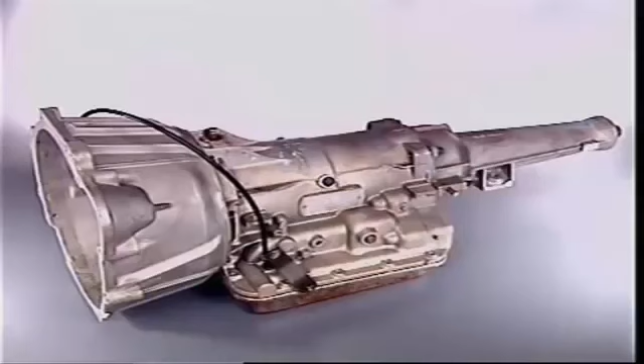A Borg-Warner 35 transmission has 3 forward gear ratios and reverse. The selector lever works in a quadrant with 6 stations: park, reverse, neutral, drive, second, first.

With D selected, the vehicle will move off in first gear, will change to second and then to third, in accordance with road speed and engine load.

Downshifts from third to second or second to first are also fully automatic, unless the driver resorts to kickdown. Kickdown changes are useful when short bursts of acceleration are required and occur at higher speeds than automatic changes. Automatic upshifts occur immediately accelerator pressure eases, following a kickdown.

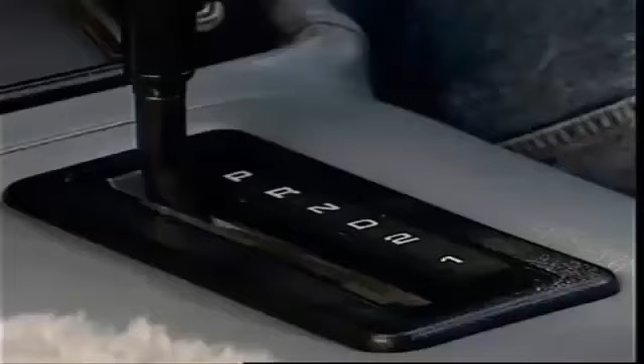Automatic gear changes may be overridden by use of the 2 and 1 selector positions. If 1 is selected from rest, first gear will be held until the selector is moved to 2, when second gear will engage.

Moving to D will then give third gear, provided that road speed and throttle opening are suitable. Selector position 2 also permits automatic changes, but from first to second and from second to first only, depending on road speed and throttle opening. Third gear will not engage in this position.

With the vehicle cruising in third, selecting 2 will cause an immediate downshift to second. Selecting 1 in similar conditions causes an immediate downshift to second, and then, when road speed drops sufficiently, to first. Full engine braking is available in both second and first gears. This also applies when the vehicle is in reverse.

The planetary gear set is a Ravigneaux type with primary and secondary sun gears, primary and secondary planet pinions, and 1 ring gear.

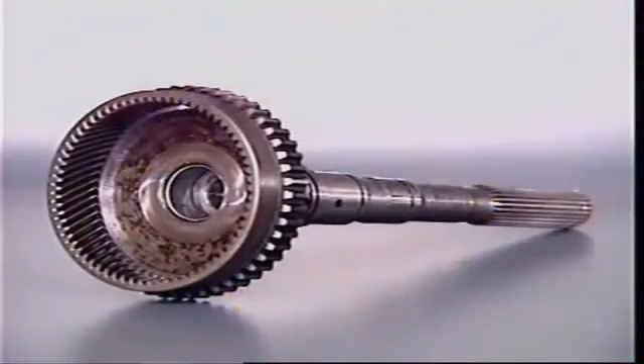The ring gear is attached to the output shaft. The planet carrier is mounted in the transmission case on a 1-way clutch.

Both sets of pinions are in the planet carrier. They mesh in pairs. The longer outer secondary pinions mesh with the ring gear at their outer edge. At their inner edge, they mesh with the secondary sun gear.

The smaller primary pinions mesh with the smaller primary sun gear. The planet pinions transmit the drive from the sun gears to the ring gear.

In all forward ratios, drive is transmitted through the primary sun gear. In reverse, it is transmitted through the secondary sun gear.

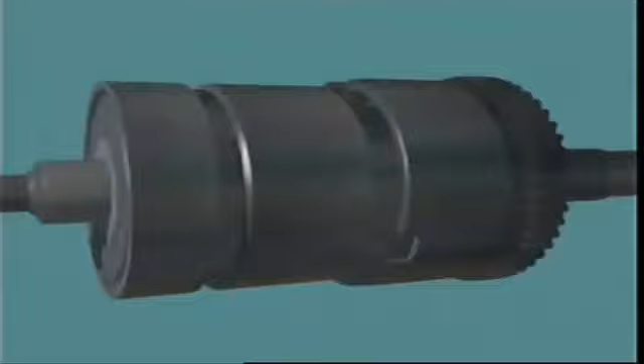Control of the planetary gear set comes from the operation of 2 multi-plate clutches, the 1-way clutch and 2 brake bands. The outer plates of the front clutch are splined to the input shaft from the converter turbine.

The inner plates are splined to the primary sun gear shaft. The inner plates of the rear clutch are splined to the front clutch drum. The outer plates connect to the secondary sun gear.

The front band wraps around the outside of the rear clutch drum. The rear band is on the outside of the planet carrier to hold the planet carrier stationary when it is applied.

When the rear band is in the release position, the 1-way clutch lets the planet carrier rotate forward, but not in a reverse direction.

These are the components and control elements engaged in each gear range: the front clutch, the rear clutch, the front band, the rear band, and the 1-way clutch.

The front clutch combines with other elements to provide the required ratios for all forward gears. When D is selected, the front clutch is engaged.

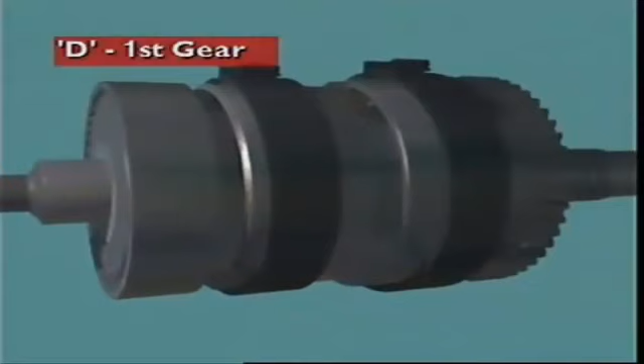The one-way clutch acts as the reaction member, holding the planet carrier stationary and stopping it rotating in the opposite direction to the input shaft.

Power flow is from the input shaft through the applied front clutch to the primary sun gear, which turns clockwise. Since the primary sun gear is meshed with the primary pinions, the pinions rotate anti-clockwise.

This turns the secondary pinions clockwise on their pins on the locked planet carrier. The secondary pinions turn the ring gear and the output shaft in a clockwise direction at a reduced ratio and with increased torque.

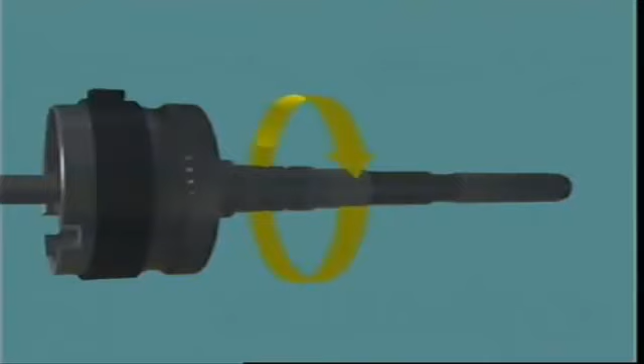The gear reduction in first gear is 2.39 to 1. The secondary sun gear rotates freely in the opposite direction to the primary sun gear.

On overrun, when torque is applied from the road wheels, the one-way clutch unlocks and allows the planet carrier to rotate. The transmission free wheels and no engine braking is provided.

In selector position D and also in position 2, the front clutch and the front band are applied to obtain second gear. When the transmission changes from first to second, the front clutch remains engaged and the front band is applied to lock the secondary sun gear to the case.

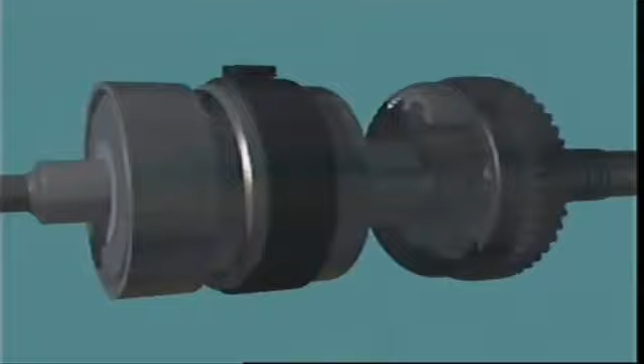The secondary sun gear now becomes the reaction member. Power flow is from the input shaft through the applied front clutch to the primary sun gear and to the primary pinions.

The anti-clockwise rotation of the primary pinions turns the secondary pinions clockwise. Since they mesh with the secondary sun gear and the ring gear, they walk around the stationary sun gear and rotate the ring gear in a clockwise direction. In both drive and overrun conditions, torque reaction is taken by the applied front band, which holds in either direction. The gear reduction in second gear is 1.45 to 1.

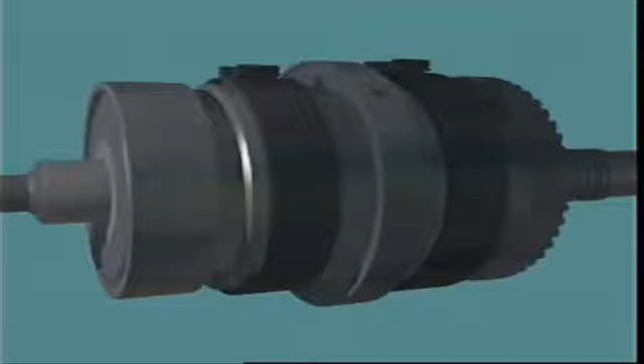In selector position D, the front and rear clutches are applied to obtain third gear. When the transmission changes from second to third, the front clutch remains engaged. The front band is disengaged and the rear clutch is applied. Since both clutches are now applied, the input shaft is locked to the primary sun gear through the front clutch and to the secondary sun gear through the rear clutch. With both sun gears locked together and to the input shaft, there is no relative motion between the gears. The whole gear set rotates as one unit to give a direct drive with a ratio of 1 to 1.

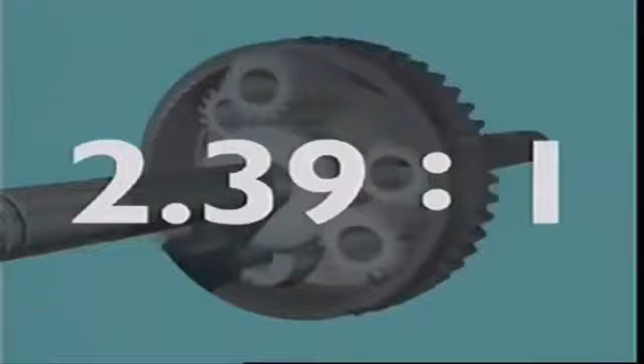In selector position 1, the front clutch and the rear band are applied. Application of the rear band locks the planet carrier to the case. Power flow through the gear set in the drive condition is the same as in selector position D, first gear. Drive is transmitted through the front clutch to the primary sun gear and through the short and long pinions to the ring gear at the ratio of 2.39 to 1. However, on overrun, the locked planet carrier acts as a reaction member, so full engine braking is provided.

In reverse, the rear clutch and the rear band are applied. The rear clutch locks the input shaft to the secondary sun gear. The rear band locks the planet carrier to the case to provide the reaction member. The input shaft turns the secondary sun gear clockwise. The secondary pinions turn anti-clockwise on their pins on the locked planet carrier. The ring gear and output shaft turn in the reverse direction with a ratio of 2.09 to 1. Full engine braking is provided on overrun.

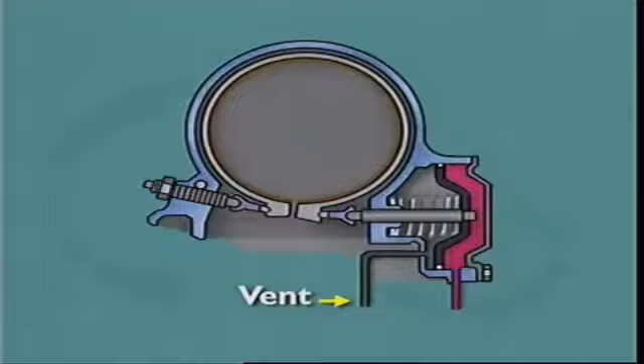Servos in automatic transmissions convert hydraulic pressure acting on a piston into a mechanical force. In this transmission, a front and a rear brake band are used. A servo is required for each.

The rear servo is a pressure apply spring release type. Its piston has a central stem which locates in one end of the rocker arm to transfer the apply force to the band. A lever-type spiral spring returns the servo and band to the off position when the fluid is dumped. The rear band holds the planet carrier stationary when it is engaged.

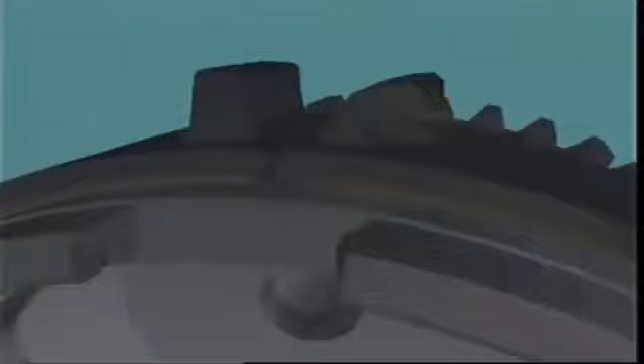It is applied in drive ranges with low ratios. The high apply force required is provided by a combination of the large diameter piston and the leverage provided by the rocker arm. Fluid at line pressure is converted to an apply force by the piston, and this acts on the longer end of the rocker arm. The apply force is multiplied to about 5 times its value, then applied to the free end of the band.

The band contracts and wraps itself firmly around the planet carrier drum to lock the planet carrier to the casing. An adjusting screw threaded in the casing provides the anchorage point, so the band can be easily adjusted when necessary to compensate for wear.

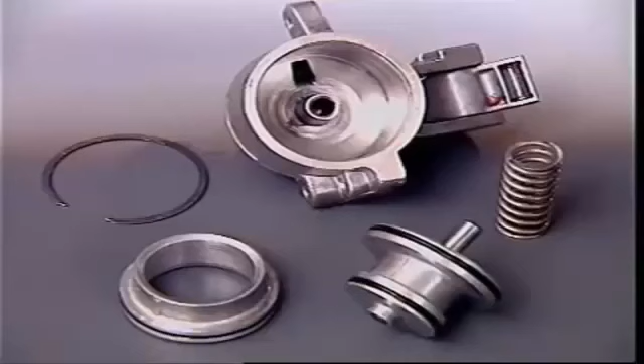The front servo is a pressure apply, pressure release type with unequal piston areas. It is engaged with the front clutch to provide second gear and acts on a lined spring steel band to lock the secondary sun gear to the casing. The apply force from the piston is transferred through its central stem and multiplied by the rocker arm with its leverage ratio approximately 3:1. This applies the band firmly when second gear is engaged.

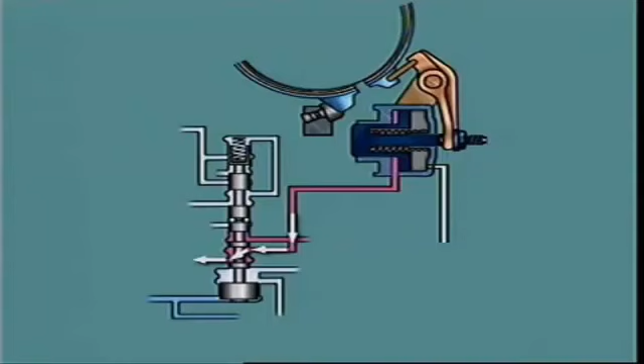The apply fluid acts on the smaller piston area surrounding the hollow portion, which accommodates the return spring. If road speed is reduced, the 1-2 shift valve will move to the first gear position. This apply fluid will be exhausted at the 1-2 shift valve, letting the spring return the band to the off position.

If road speed increases, the transmission will eventually upshift to third gear. This requires the rear clutch to engage, together with the already engaged front clutch. The front band must be released, but the apply fluid is not exhausted to provide this change. The apply fluid is retained.

Then, when the 2-3 shift valve moves to supply fluid to the rear clutch, the same fluid is supplied to the release side of the front servo. Equal line pressures act on each side of the front servo piston, so the larger area on the release side generates greater force. This moves the piston to the released position.

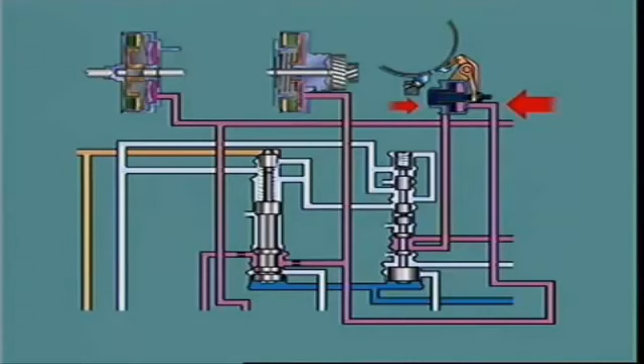If the accelerator is depressed for kickdown, or road speed drops off, retaining the apply fluid can provide a snap band application to re-engage second gear.

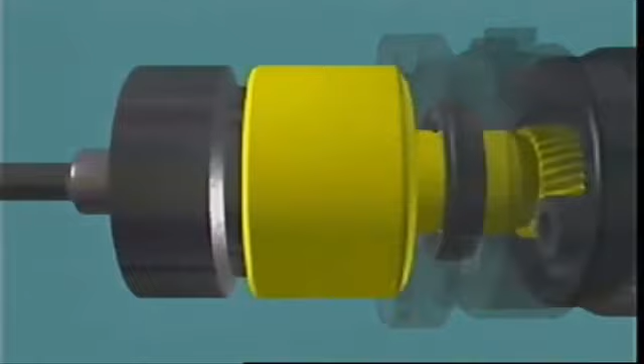Clutches in automatic transmissions control gear train members. This transmission has three clutches: a one-way or overrunning clutch between the planet carrier and the center support, a multi-plate clutch inside the drum attached to the input shaft (the front clutch), and a multi-plate clutch inside the drum attached to the secondary sun gear (the rear clutch).

The one-way clutch is a Sprag type. It locks the planet carrier to the center support whenever the carrier tends to turn in the opposite direction to the transmission input shaft. The inner race of the clutch is provided by an extension on the center support, and the outer race is formed in the planet carrier.

The equally spaced Sprags are held together by a spring-loaded cage, which maintains them in the correct position and attitude. Correct fitting is essential, otherwise the planet carrier will freewheel when it should be locked up, and no drive will be transmitted in D-range first gear.

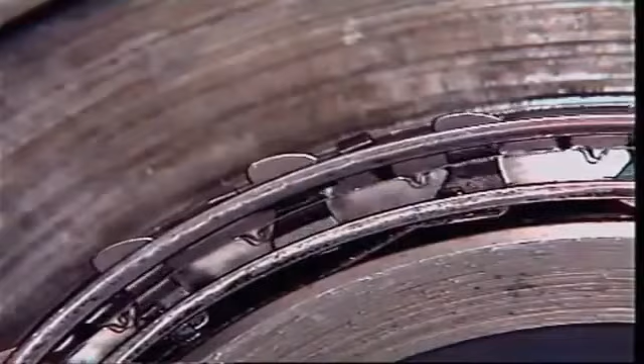With the sprags in place, the cage moves them so that they share the load equally when the planet carrier is locked. Turning the planet carrier in the opposite direction to the input shaft pivots the sprags towards the larger radius and wedges them between the two races.

The front clutch is a multiplate type, engaged in all forward ratios. The clutch operating piston moves in a short cylinder in the clutch drum. A diaphragm-type spring contacts a fulcrum ring on the piston at its inner circumference, and its outer edge rests against a step in the drum.

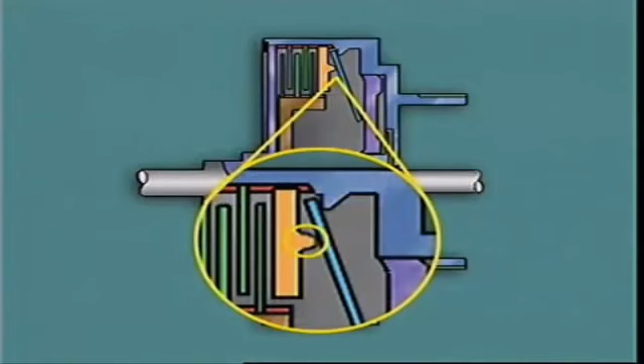A pressure plate is installed first in the clutch pack, so that its fulcrum ring also contacts the diaphragm. When fluid at line pressure is admitted to the clutch cylinder, the piston apply force is multiplied by the leverage provided by the diaphragm. This exerts a greater apply force on the clutch pack than the piston alone could provide, and ensures the clutch is firmly engaged. The spring returns the piston to the off position when the fluid is dumped.

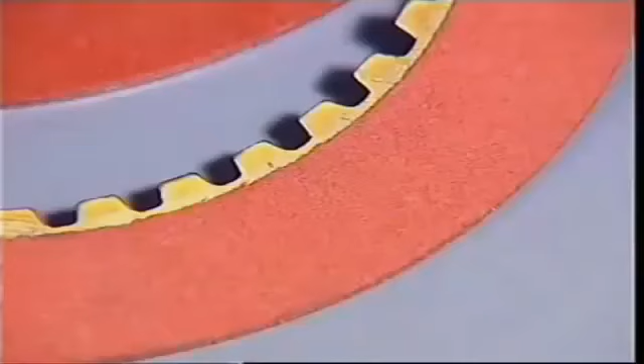Two sets of plates make up the clutch pack: the driving plates and driven plates. The outer driving plates are flat, with external splines that locate in mating splines in the clutch drum. The inner driven plates have friction material bonded to them. Their splines mate with splines on the outside of a central hub, which is itself splined to the primary sun gear. The friction material can be treated fiber or reinforced paper, and it may have a grooved surface to assist in wiping oil from between the plates when the clutch engages.

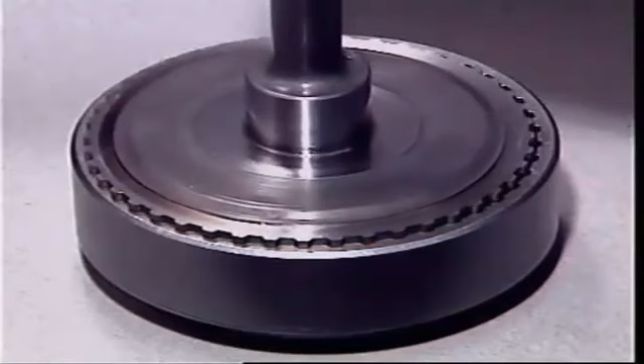The plates are loaded into the clutch drum against the pressure plate and placed alternately to make up the pack. The central hub is installed to engage the inner plates, and the thrust washer is placed in position. The large face of the input shaft acts as the final plate in the pack. The splines at its outer edge transmit the input torque to the clutch drum and the driving plates. The input shaft is retained in the drum by a large diameter snap ring.

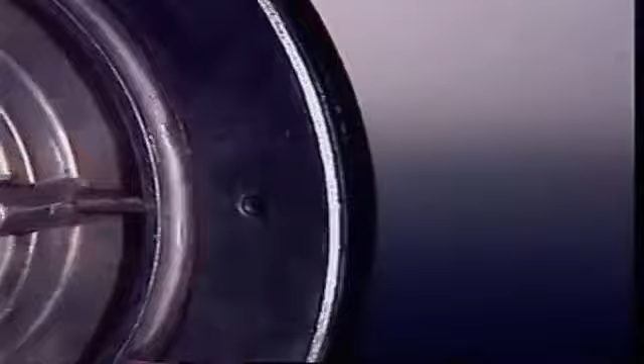The number of plates installed determines the torque capacity of the clutch. Installing more plates increases torque capacity, but the clutch must always maintain its set clearance so the plates can separate from one another while in the released position. A centrifugal relief valve in the clutch piston releases fluid trapped in the cylinder when the clutch is released. This prevents partial application of the clutch due to centrifugal force acting on the fluid at high speed.

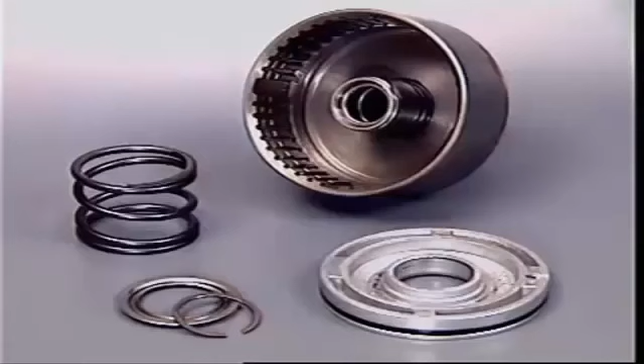The rear clutch is similar in construction to the front clutch, but with a larger diameter piston and a coil-type return spring. This spring is compressed against the face of the clutch piston when fitted. The outer plates in this clutch are the driven plates and are splined to engage with the splines in the clutch drum as before.

These plates may have a flat surface or a slightly dished or coned surface. The dished plates provide a cushioning effect, which assists with smooth engagement when the clutch is applied. The plates may be fitted as a pack, with the dishing in either direction, but all of the dishing must face the same way, or clearance may be compromised.

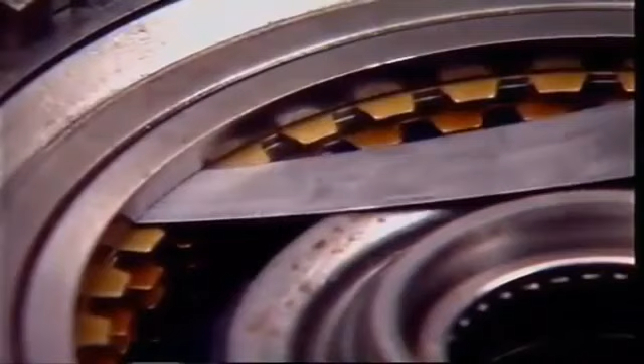The inner plates are splined to mate with splines on an extension on the front clutch drum. They transmit the drive from the input shaft to the outer plates when the clutch is engaged. The clutch plates are assembled in the pack alternately, with the steel plate placed first against the clutch piston. The pressure plate is assembled last, and the pack is retained in the drum by a snap ring.

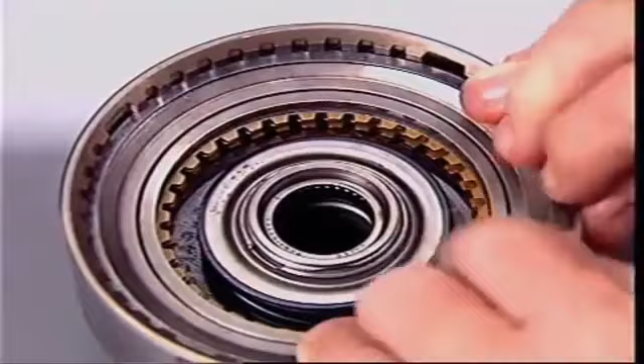The hydraulic system has a crescent-type gear pump, a centrifugally operated hydraulic governor, and a control valve body assembly to regulate the pressure and direct fluid to the appropriate components.

The pump is driven by tangs on the converter spout and operates whenever the engine is running. It supplies all the hydraulic requirements of the transmission during operation.

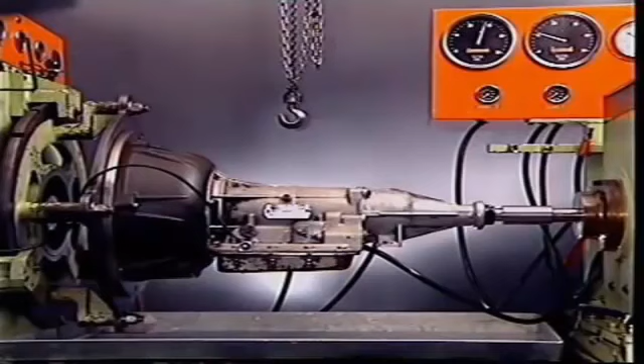The governor is driven by the transmission output shaft and provides a hydraulic pressure that varies with vehicle speed. This variable pressure is used by the valve body as one of the inputs to control upshifts and downshifts.

The valve body has all the valves needed to control the transmission at all stages of operation. They are mostly spool-type valves, but disc and ball check valves are also used.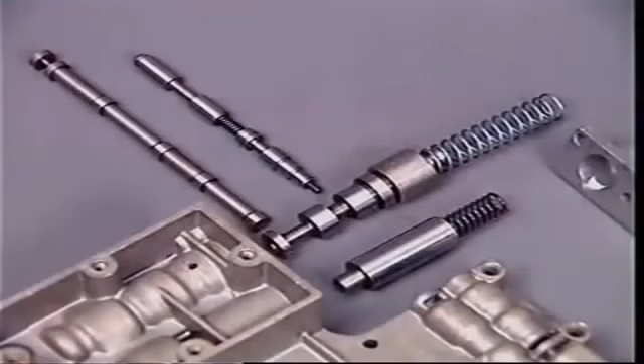Cylindrical spool valves have a number of distinguishing features. The lands are the raised portions of the valve, while the reduced diameter between each pair of lands is referred to as a valley. The face of each land is square and sharp to the land diameter.

Some valves have a stem or extension on one end to locate a regulating or return spring, or to limit valve travel.

Sharp corners on lands keep out dirt particles and give the valve a self-cleaning action as it moves back and forth in the bore. There is only small clearance between lands and the bore for each valve, so they must be handled with care.

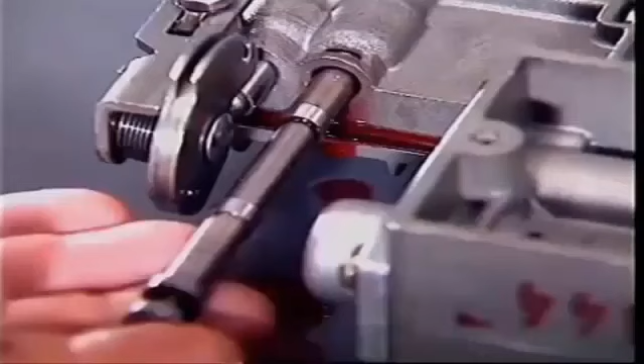Spool valves can be positioned manually, by springs, or by pressure, and in many applications have lands of different diameters. In this case, the different diameters result in a larger face area on land 1 than on land 2. This is known as a differential area.

When fluid under pressure enters port B, this differential area creates a differential force. This moves the valve to the left since the force acting on land 1 is greater than the force on land 2.

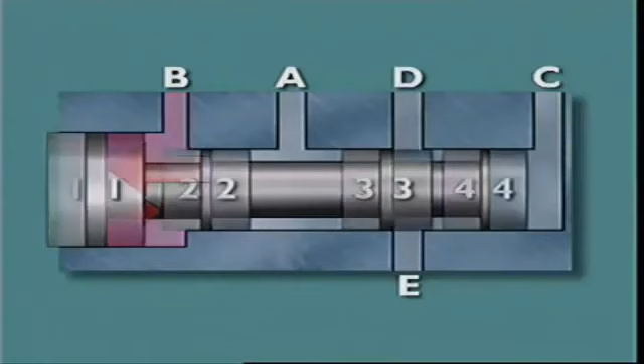Alternatively, the valve could be moved by admitting fluid at port C. In both cases, the valve movement allows previously blocked fluid at D to flow between lands 3 and 4. It exhausts at E or passes to some other part of the system.

If fluid pressure is removed from C, the valve remains stationary. Even if fluid is admitted at port A, no movement can occur as the areas on lands 2 and 3 are equal and both generate an equal force.

The valve can only be moved back to its original position by introducing spring pressure or fluid pressure on the left-hand side of land 1.

The valves can be divided into two groups: pressure regulating valves, and those that direct flow and pressure, or flow control valves.

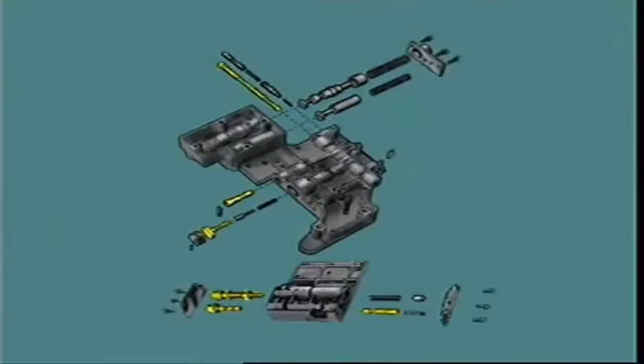Spool-type valves are suitable for pressure regulation in automatic transmissions, as variable pressures are needed.

In this regulating valve, the valve spring is compressed when pump or supply pressure is high enough. The larger land then uncovers an exhaust port to maintain a regulated output pressure.

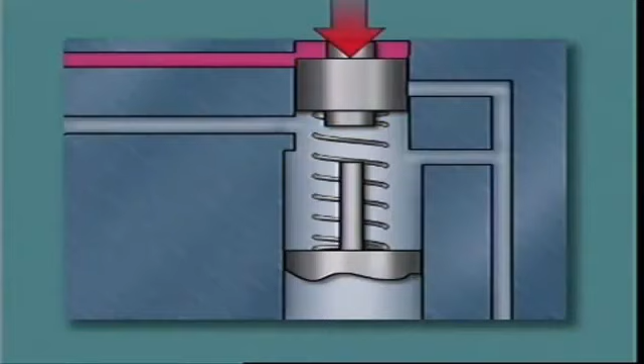Similarly, with this regulating valve in a fluid circuit, the valve is forced downwards against its spring until it uncovers a port to another part of the circuit.

Since the port is not fully uncovered, flow is restricted, which causes a pressure drop across it. Fluid pressure in this part of the circuit falls below that of the fluid being supplied. Once the port is fully uncovered, pressures on both sides of the valve become equal.

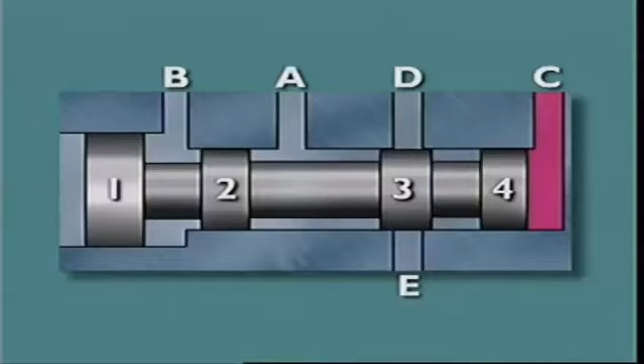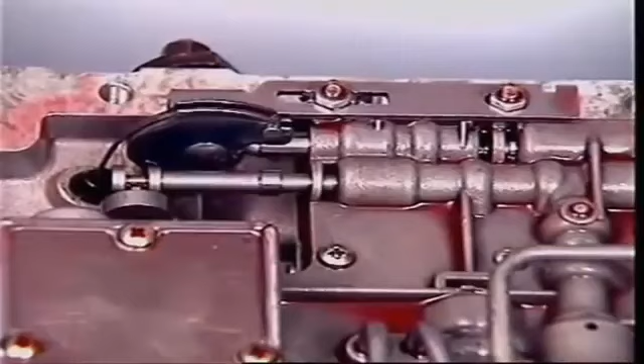Control valves are simple gate-type valves, which open or close off a circuit without altering pressure. The manual valve connected to the gear lever is a control valve, which directs fluid to components when a drive range is selected.

Control valves can also react to changes in pressure. This shift valve is held at the end of its bore by spring tension. It blocks the fluid under pressure at port A.

The larger differential area at port C is subject to governor pressure. As road speed rises, the rising pressure forces the valve to the left, and fluid flows across from port A to port B. This can be directed to operate the next clutch or servo and change the transmission to a higher ratio.

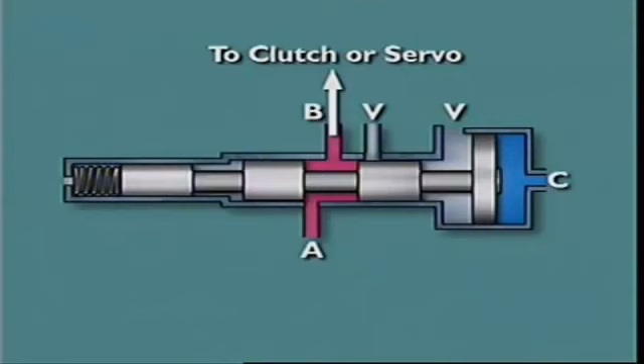As road speed falls and governor pressure diminishes, the spring moves the valve back to cut off the fluid supply and the transmission downshifts.

Orifices are often used in conjunction with spool valves to restrict fluid flow for timing purposes or to prevent valve fluctuations. The orifice is designed to prevent sudden or undue movement of a valve.

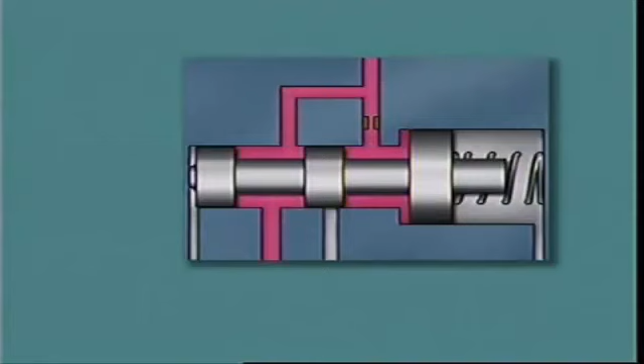In this basic primary regulator valve, the orifice is in the circuit leading to the large differential spool area. The build-up of line pressure from the pump acts via the orifice to move the valve against the spring force.

This uncovers the exhaust port to release excess fluid and allows fluid at a controlled line pressure to pass to the rest of the hydraulic system. The pressure is determined by the tension of the spring.

However, pressure fluctuations are reduced because the orifice prevents the valve from reacting quickly and thus stabilizes the regulated pressure.

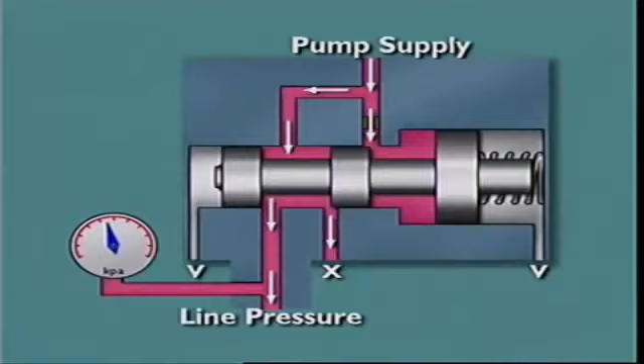The hydraulic system of this transmission has a number of regulating and control valves. They can be identified in this hydraulic circuit diagram.

This valve controls fluid pump output to maintain the required line pressure in the system. Line pressure is the highest pressure in the transmission. All other pressures are derived from it.

This valve reduces line pressure to a low value for use in the torque converter and in the cooler and lubrication circuits.

This valve is positioned manually by the driver operating the selector lever. It's a control valve which directs line pressure in and out of circuits when each range is selected.

This valve shares a common bore with the downshift or kickdown valve. Both are influenced by the downshift cam, connected by a Bowden cable to the accelerator linkage.

The throttle valve re-regulates line pressure to a value which is proportional to throttle opening. The resultant throttle valve or TV pressure varies from 0 at closed throttle to line pressure at full throttle.

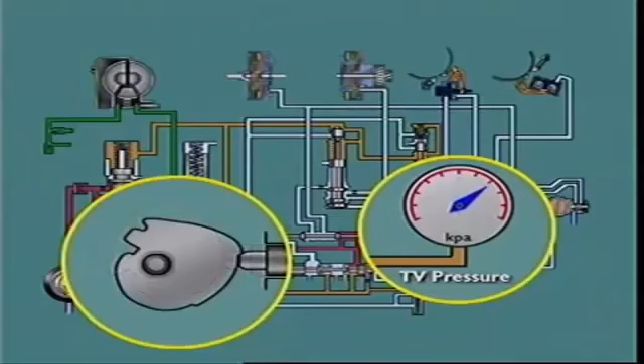This pressure is supplied to the spring end of the shift valves to delay upshifts relative to throttle opening. The wider the throttle opening, the greater the TV pressure and the higher the road speed will be before an upshift will occur.

TV pressure is also directed to the spring end of the primary regulating valve. As the accelerator is depressed, it progressively raises line pressure.

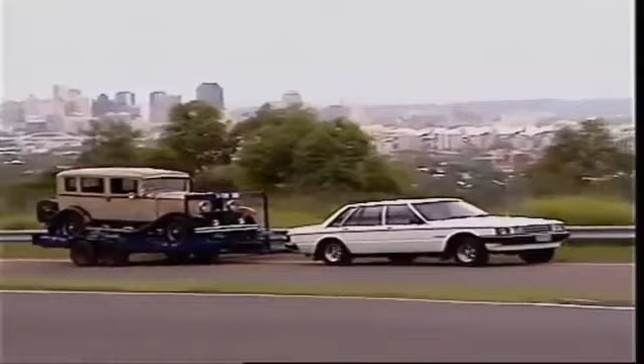This ensures the engaged servos or clutches are securely applied when high torque is being transmitted and allows the pump to operate at lower pressures at other times. This reduces pumping losses and lowers fuel consumption.

The 1-2 and 2-3 shift valves are control valves, which are supplied with line pressure from the manual valve. They either block fluid or allow it to flow at prevailing line pressure to a clutch or band.

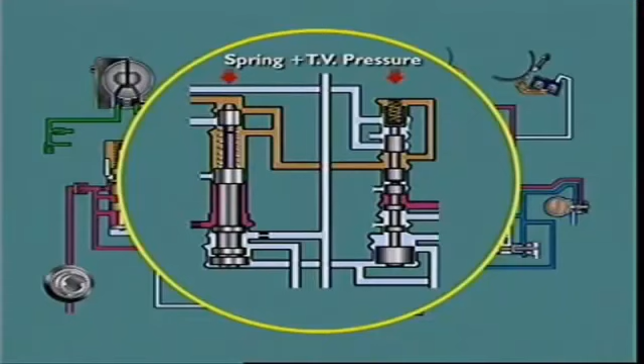Their operation is determined by a spring plus TV pressure at one end. This acts in opposition to governor pressure at the other end.

This valve is mounted on the transmission output shaft and rotates with it. It re-regulates line pressure supplied from the manual valve in relation to vehicle speed.

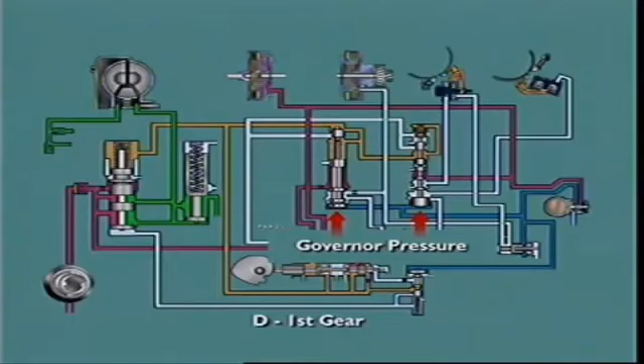When vehicle speed is low, governor pressure is low. When vehicle speed is high, governor pressure is high. Governor pressure is directed to the end of the shift valve to oppose TV and spring pressure. This produces upshifts relative to vehicle speed.

This valve is included in the throttle valve combination. When the accelerator is depressed fully, the downshift valve supplies line pressure onto the spring end of the shift valve.

If road speed is below a certain value, this forces the shift valve to move and initiate a downshift to a lower gear.

This valve is in the circuit to the release side of the front band servo. It is a timing device. When a 2-3 upshift is made at higher road speeds, it correlates front band release and rear clutch application. Conversely, it correlates rear clutch release and front band reapplication when a 3-2 downshift is made under similar conditions.

This valve makes line pressure and throttle pressure sensitive to road speed. At higher speeds, it cuts back these pressures to allow smooth upshifts.

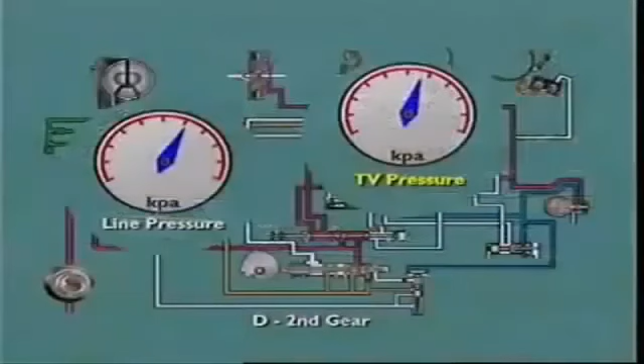It also moderates line pressure increases produced by wide throttle openings during stall or upshift conditions. High throttle pressures produced at these times raise line pressure very high. This is because the throttle pressure is applied to the spring end of the primary regulating valve. Modulator pressure is applied to the opposite end of the regulating valve to counteract this and moderate its influence.

This is a summary of the basic action of the valves in the hydraulic system. The primary regulating valve maintains line pressure in the system. Line pressure is directed to the manual valve and to the throttle valve at all times.

The secondary regulating valve determines the pressure in the converter and in the lubricating circuits. The manual valve directs line pressure to the shift valves and to the governor valve. The shift valves direct line pressure to the band and clutch servos.

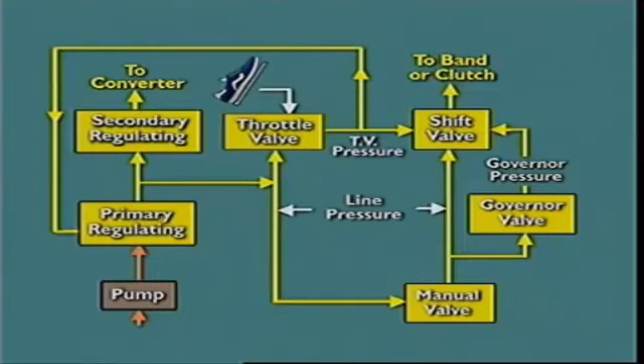Governor pressure is directed to one end of the shift valves, while throttle valve pressure is directed to the other end. Throttle pressure is also directed to the spring end of the primary regulating valve to boost line pressure as required.

The valves act together in the system, but their operation can be considered separately. The primary regulating valve has a number of lands, including one larger land which provides a differential area. A central stem locates the regulating spring.

Fluid from the pump can act on the valve through a 1 mm diameter orifice in the circuit. With the valve at rest, the two central lands block the flow of fluid across their valleys. The spring end of the valve is subject to throttle pressure through a circuit connection from the throttle valve. The lower end is subject to modulator pressure acting on the lower face of the bottom land. A vent between the two uppermost lands prevents hydraulic lockups due to fluid seeping into the valley between them.

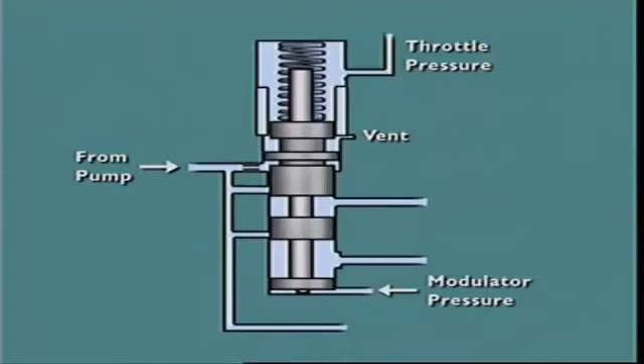In operation, fluid from the pump enters the valve through the orifice and acts against the differential area. As pressure rises, the valve moves upwards against its spring. Excess fluid can then pass across the two large valleys to the ports in line with them. The result is an initial regulation of line pressure at idling speed.

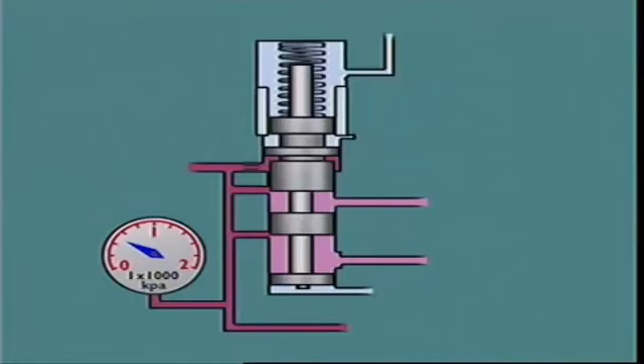This line pressure is directed to the manual valve and the throttle valve at all times. When D is selected, line pressure is also directed to the front clutch, to the 1-2 shift valve, and to the governor. Excess fluid passing across the valleys is directed to the secondary regulating valve and the converter.

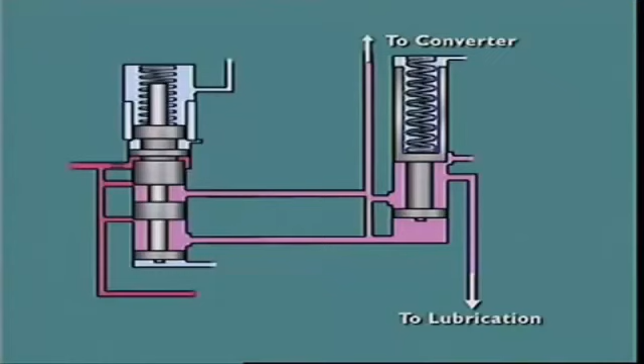Fluid from the lower port of the primary regulator valve acts on the end face of the secondary regulating valve. This raises it against its spring. Valve movement uncovers a port to the lubrication circuit for the rear end of the gear train, and then an exhaust port leading back to the pump inlet. The exhaust bleed-off stabilizes fluid pressure in the lubrication and converter circuits within acceptable limits, from 100 to 200 kilopascals.

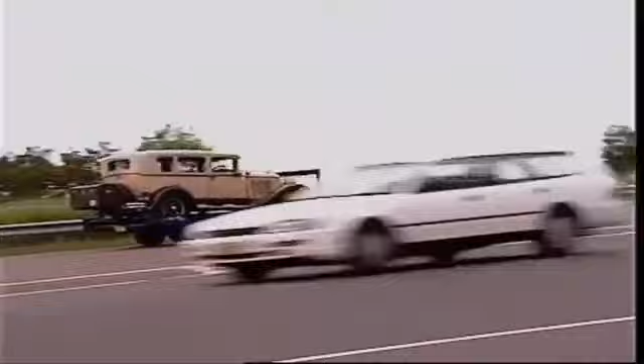Line pressure needs to vary in step with accelerator position and vehicle speed. That requires extra control over the primary regulating valve. High line pressure will hold a band or apply a clutch securely to prevent slippage when the accelerator is depressed and high torque is transmitted. Once the vehicle is moving and the transmission is upshifting, less torque is transmitted, so lower line pressure is adequate.

Applying throttle pressure to the spring end of the primary regulating valve lifts line pressure. Applying modulator pressure to the opposite end reduces it. Line pressure is supplied to the throttle valve at all times, and throttle pressure is derived from it.

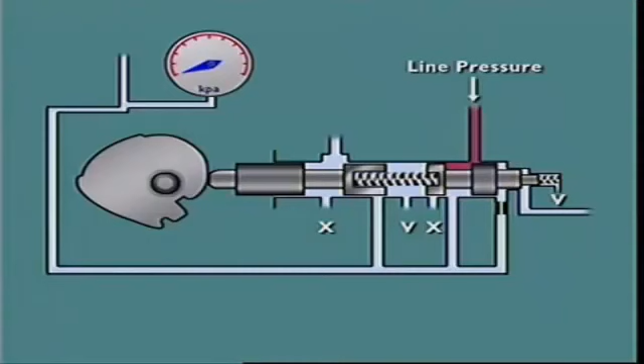At closed throttle, the throttle valve is at rest and line pressure is blocked off by a land. Throttle pressure is zero. Depressing the accelerator transfers movement through the kickdown valve and spring. This opens the throttle valve and the land uncovers the line pressure port. Fluid at line pressure is now metered into the throttle valve circuits and a TV pressure is quickly established.

It extends through the orifice to the valve reaction area. This tends to close the valve against the spring force, minimizing pressure fluctuations. A balance is established to produce a TV pressure relative to the accelerator position. TV pressure can vary from 0 to around 1200 kilopascals.

TV pressure is directed back through the circuits to the spring end of the primary regulator valve. It helps the spring oppose the force of fluid acting on the valve's differential area via the orifice. TV pressure holds the primary regulator valve down to increase line pressure according to throttle opening. This ensures clutch and band apply forces are maintained in step with throttle position.

Once a vehicle is moving, the primary regulator valve needs to reduce line pressure to assist smooth gear shifting and fuel economy. Modulator valve pressure is directed to the end of the valve opposite to the regulating spring.

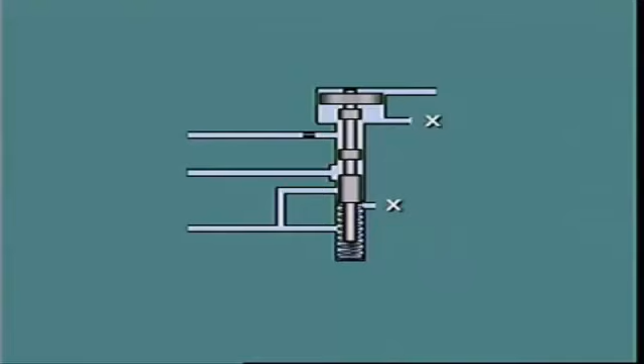The modulator valve assembly is in two sections: a modulator valve and a modulator plug and spring. The modulator valve operates by throttle pressure, but is also subject to governor pressure, so its output responds to accelerator position and vehicle speed. Throttle pressure directed to the modulator valve moves the valve up and forces the plug down against the compression of the spring. Separating the valve from the plug re-regulates the throttle pressure to modulator pressure.

It is then directed to the end of the primary regulator valve opposite the spring. If the accelerator is fully depressed, high modulator pressure forces the primary regulator valve upward to oppose throttle pressure and spring pressure. This prevents excessive line pressure under stall conditions.

Rising vehicle speed develops governor pressure, which is directed onto the large land area at the end of the modulator valve. When governor pressure overcomes throttle pressure, it forces the modulator valve down. That forces the modulator plug to bottom out. The modulator plug can then no longer reduce the incoming throttle pressure.

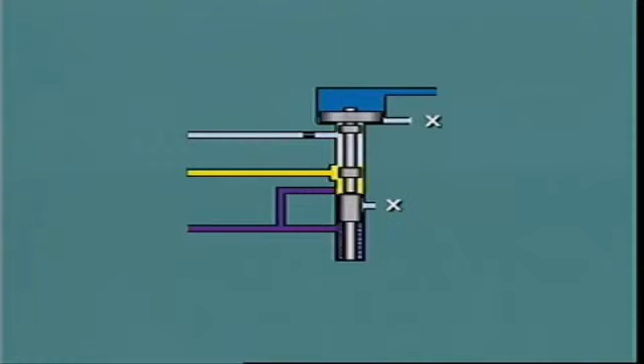Undiminished throttle pressure will now exist in the modulator circuit. The regulator valve is forced up, reducing line pressure for a smooth upshift. This reduction in line pressure is called the cutback point.

Moving the modulator valve down allows throttle pressure to pass between the modulator valve lands. This passes into a circuit, returning to the smallest reaction area at the end of the throttle valve. This pressure acting through the orifice in the circuit helps move the throttle valve to the left against its regulating spring. This reduces the initial throttle valve pressure established in the throttle pressure circuit, and in turn further reduces line pressure.

When D range is selected, the manual valve directs fluid at line pressure to the front clutch, which remains applied in all forward gears. Fluid is also directed to the governor and the 1-2 shift valve, where it is blocked at a differential area. A separate circuit from the manual valve directs line pressure to a differential area of the 2-3 shift valve. This is held in the downshifted or 2 position by a combination of the differential force and the spring force.

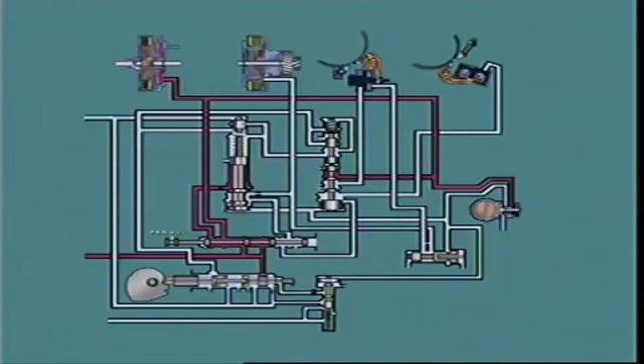The 1-2 shift valve is in 2 sections. The shift valve itself is the lower section, held in its downmost position by a combination of the differential force and the upper section plunger and spring. As soon as the accelerator is depressed, throttle pressure helps hold the valves in the downshifted position so that their movement is influenced by accelerator position.

When the vehicle is moving, the governor re-regulates line pressure supplied to it and directs this pressure to the large land areas at the bottom end of the shift valves, to the servo orifice control valve, and to the modulator valve.

The governor is in 2 sections: the valve and its spring, and a central stem and bob weight retained by a C-clip. It operates by centrifugal force in 2 stages. In the first stage, at lower road speeds, the bob weight and valve act as one unit.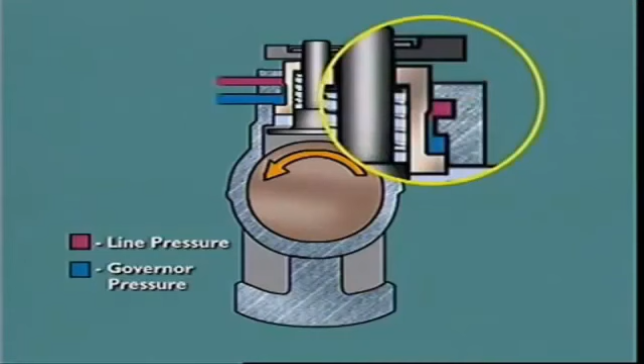Rotation of the governor throws out the bob weight, causing the valve to uncover the line pressure supply port, and fluid under pressure flows through the port to exert thrust on the face of the valve. This thrust increases until it can close the valve against the opposition of the centrifugal force. The valve action produces a pressure at the outlet proportional to the force acting on the bob weight. As speed increases, pressure needed to close the valve increases also. For any given value of line pressure, the result is a governor pressure which increases with speed.

The second stage starts when the bob weight stop contacts the body. Balance between opening and closing the valve is now achieved by the centrifugal effect on the valve and the fluid acting on its pressure face.

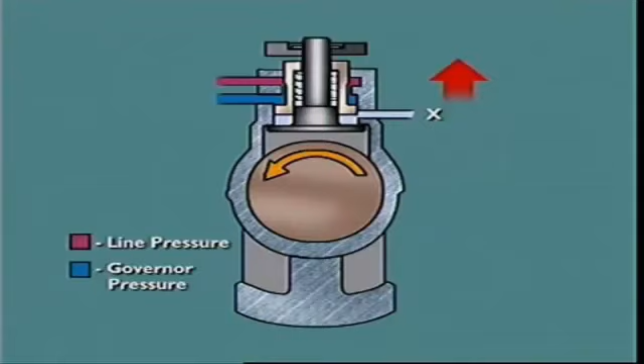Governor pressure acts on the end of the 1-2 shift valve. As road speed increases, it becomes high enough to overcome the opposing spring and throttle pressure. The shift valve assembly moves upward and lets line pressure pass into the circuit to the apply side of the front band servo. The transmission is now in second gear.

Once the 1-2 upshift occurs, the differential area is no longer effective. Governor pressure must fall to a lower value to let the valve return to the first gear position, so a 2-1 downshift cannot occur at the same road speed as the upshift.

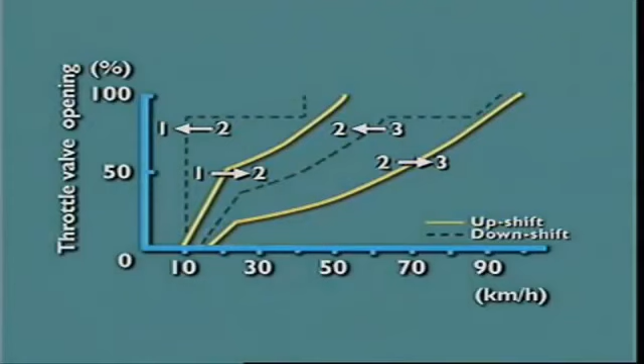Downshifts occur only at vehicle speeds below those at which upshifts occur. This shift spread prevents a transmission hunting up and down between ratios. It is called shift speed hysteresis.

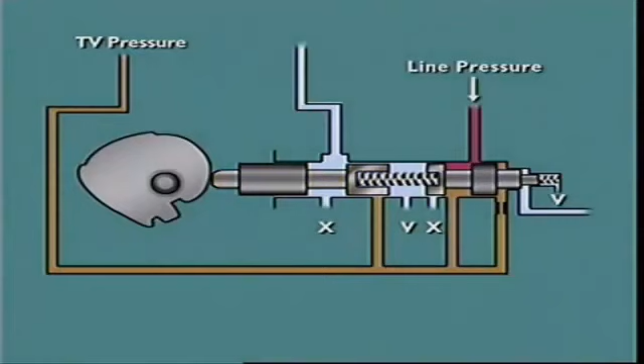Additional force can be provided to produce a 2-1 downshift under kickdown conditions. This is provided by the kickdown portion of the kickdown throttle valve combination. When the accelerator is fully depressed, the kickdown valve closes off the exhaust from the kickdown circuit and forces the throttle valve to the end of its bore.

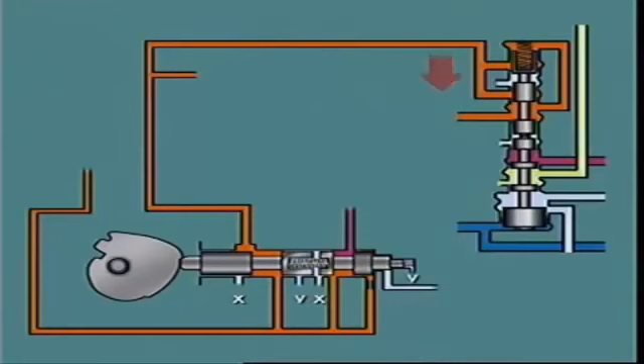The throttle valve can then no longer regulate the incoming line pressure. Throttle pressure now becomes equal to line pressure and passes into the kickdown circuit, leading to the kickdown port at the 1-2 shift valve. Fluid passes across the valley area and onto the spring end of the plunger. The force this provides overcomes governor pressure and returns the shift valve to the first gear position. This releases the front band by opening its apply circuit and exhausting the apply fluid back to the pan.

As road speed rises, governor pressure increases. It acts on the large differential area on the bottom land, so governor pressure will become high enough to force the valve upward and overcome kickdown pressure. This keeps engine RPM within safe limits in the automatic range.

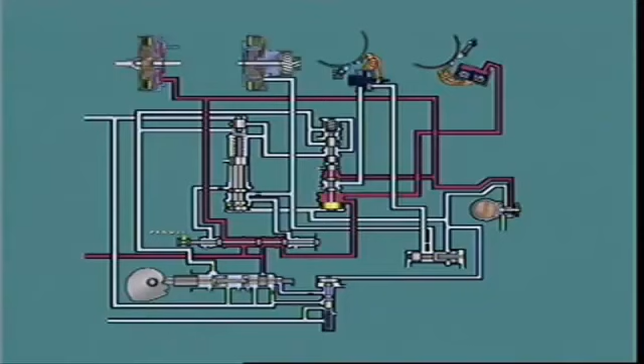When 1 is selected, the manual valve supplies line pressure onto the differential area and through a separate circuit to apply the rear band. The application of the rear band provides engine braking on overrun. This circuit passes through the bottom valley area of the valve and acts on the large bottom land to hydraulically lock the shift valve down.

Governor pressure cannot force an upshift, so the transmission will remain in first gear until the lever is moved to 2 or to D, when an upshift can occur. Once the transmission upshifts into second gear, the rear band circuit can exhaust at the shift valve. The rear band is inoperative in first gear when D is selected, as its circuit is open to exhaust at the manual valve.

Choosing position 2 directs line pressure to the front clutch, the governor, and the 1-2 shift valve. The vehicle will move off in first gear and change up to second gear as soon as governor pressure is high enough to move the shift valve up and let fluid pass to the apply side of the front servo.

No further upshifts can take place since no line pressure is supplied to the 2-3 shift valve. The valve moves upward under governor pressure, but it controls no fluid flow and no changes can occur.

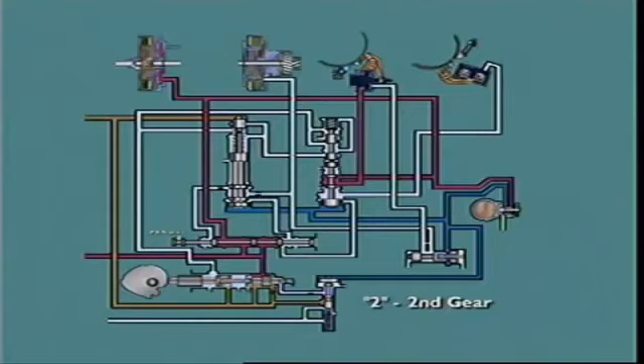The 2-3 shift valve assembly consists of the shift valve, its spring, and a throttle pressure regulating plug. In D range in second gear, line pressure from the manual valve is applied onto a differential area. This helps the spring hold the valve down against governor pressure. In this position, the rear clutch apply and front band release circuit is open to exhaust.

With the vehicle moving in second gear and a minimum throttle opening, throttle pressure applies to the top of the regulating plug. But throttle pressure is too low to move the regulating plug downwards. The only forces opposing governor pressure are the spring and the line pressure on the differential area land. A 2-3 upshift occurs at relatively low vehicle speed.

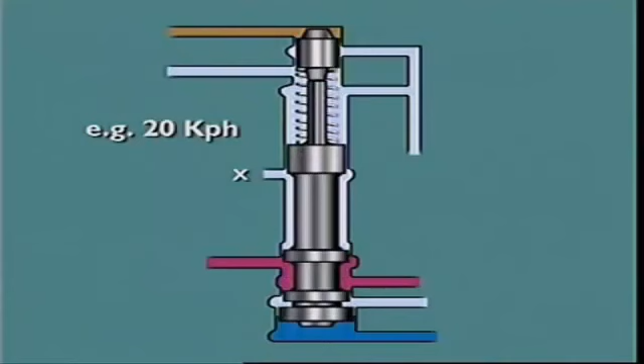With the vehicle in second gear, at higher throttle openings, higher throttle pressure moves the plug down towards the shift valve. This re-regulates the throttle pressure to a lower value so that it can act on the top land of the shift valve. This helps the spring control the shift points relative to accelerator position at lower vehicle speeds. As soon as governor pressure is high enough to overcome the opposing forces, the valve upshifts into top gear position.

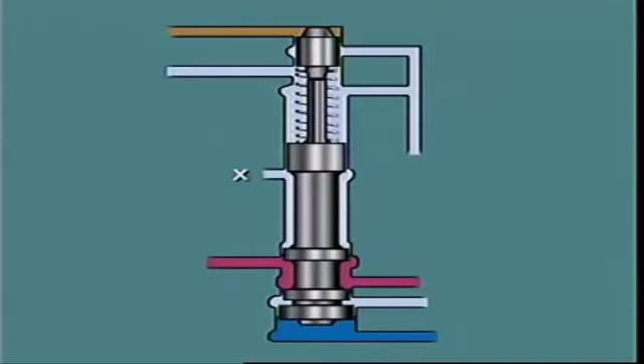Fluid at line pressure flows across to apply the rear clutch. At the same time, fluid passes through the servo orifice control valve to the release side of the front band servo. The front and rear clutch are the only components being applied, so top gear is achieved.

The servo orifice control valve is a timing device. It prevents engine flare at wide throttle openings on a 2-3 upshift. It also stops transmission tie-up, that is, being momentarily in 2 gears during a 3-2 downshift. It's a shuttle valve, which can be held at rest by a spring to allow unrestricted fluid flow, or it can be moved by governor pressure to insert a restricting orifice in the front band servo release circuit.

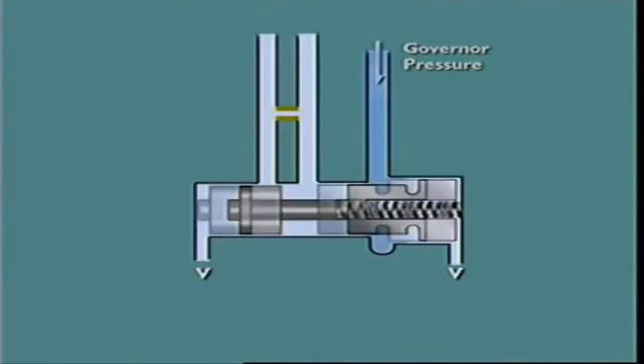At low vehicle speeds, governor pressure is not high enough to move the valve. When the 2-3 upshift occurs, fluid flows unrestricted to the release side of the front servo. This type of shift occurs at light throttle openings, so the rapid clutch and band actuation does not cause engine flare.

At wider throttle openings, vehicle speeds are higher before an upshift occurs. So governor pressure will have built up enough to move the valve, so fluid must now pass through the orifice. This slows the release at the front band and ensures the rear clutch is fully applied and able to transmit torque as the band comes off. This prevents engine flare.

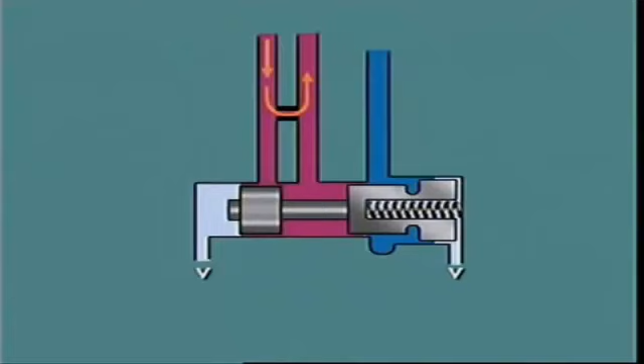On a downshift at high vehicle speeds, the orifice slows the release of fluid from the release side of the front servo and therefore the reapplication of the front band. Then the rear clutch comes off as the band is applied, preventing a lock-up in the transmission.

When a 3-2 kickdown downshift is required, the fully depressed throttle stops the throttle valve regulating the incoming line pressure. Throttle pressure becomes equal to line pressure. Fluid at line pressure passes through the kickdown valve and acts on the top land of the 2-3 shift valve.

If road speed and governor pressure are low enough, the force provided will move the valve down and effect a change to second gear. Then if road speed rises enough, governor pressure will overcome the opposing forces and move the shift valve upwards. If road speed is above a certain maximum, a downshift is denied, preventing over-revving.